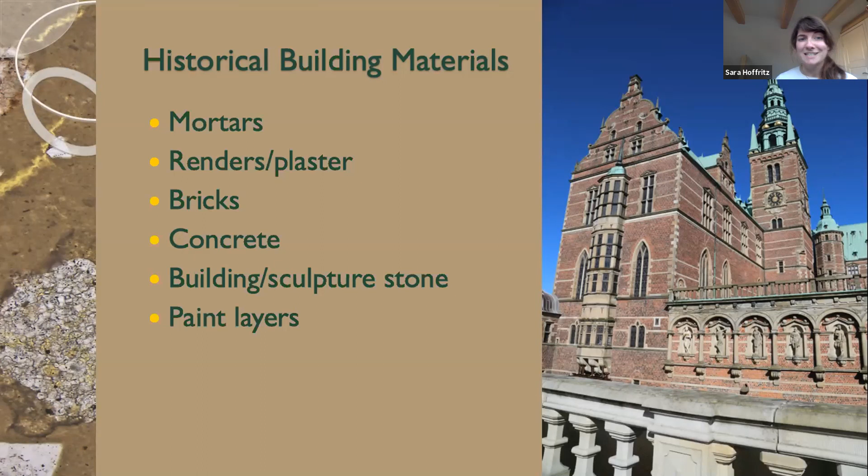So building materials, mainly we look at mineral-based building materials. We look at mortars, so the glue that you use to glue bricks together with. Mortars you also use as renders or plasters on facades and buildings. We look at the bricks themselves. We look at concrete that's usually a little bit older than this century. And then we look at building or sculpture stone, natural stone. And then we also look at paint layers. So actually quite a lot of different types of materials. And in Denmark, and I also assume quite a lot in England, these are the materials that make up most of our buildings.

So you might wonder, why is this geology? Well, I usually compare mortar or concrete to man-made lava. You have a combination of your phenocrysts, that's your sand in the case of mortars, or aggregates in the case of concrete. You have your matrix that's connecting your phenocrysts, that's your binding material. And in the case of mortars, that can be lots of different types of materials. It can be based on cement, which is a mixture of burnt lime and clay. It can be pure clay, it can be pure lime, it can be gypsum, and all sorts of different combinations. And then you also have your air.

So as you would have your air vesicles in your lava, we also have entrained or entrapped air in our building materials. You can also talk about flow structures, both for concrete and mortar. How easy is it to work with? Is it like a pahoehoe lava or like an aa lava? Which makes sense for a geologist, that the viscosity is of course different.

Then there's also the fact that you have new minerals that precipitate in air voids or in cracks. You can have alteration of your material, like in metamorphic geology, when you have alterations from one mineral to another. We also see that in our building materials. And in general, just basic mineral recognition under the microscope, knowing how to use the microscope, knowing how to recognize a mineral.

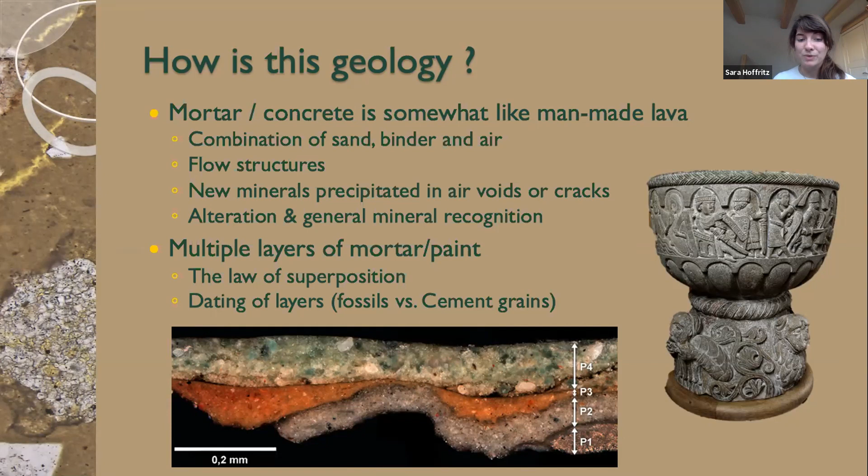And with this, we look at, okay, what is the binder material? How did they apply it? What pigments did they use for this? So quite interesting, but also geology. And then we also date our layers, mostly relative, but like how you would use fossils in a stratigraphy dating process, we also do that with some of the minerals that we see, or how the mixture has been of the mortar.

So the questions that my customers usually want answered, and the question I always ask myself, depending on whatever the customer wants, is where on the structure does this sample derive from? How old is this material? Is it original, or is it some kind of renovation that they accidentally took out and doesn't have anything to do with the original part of the structure?

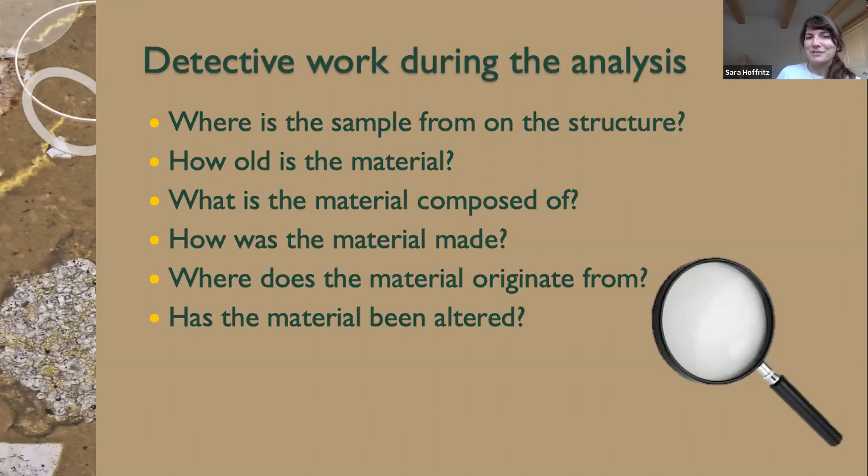What is the material composed of? What type of material is it? How was it made? Where does the material originate from? And has the material been altered? Depending on what the customer wants, we usually focus on some of these questions. And the question I want to take you through today is, where does the material originate from? Because all of the questions are approached with geological eyes, but where the material originates from is where you really get to use your geological knowledge.

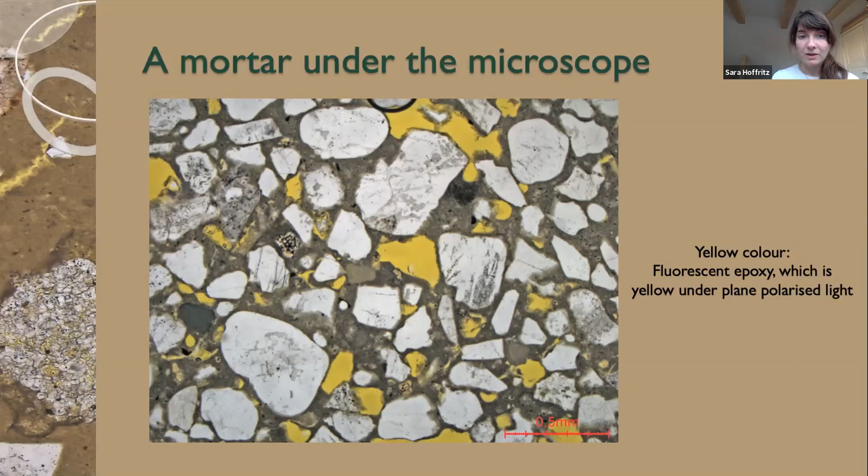All right, let's see, type of limestone. What do I look for when I try to figure out what the source of the limestone that has been used? So when you want to make a mortar, I don't want to get too technical, but you take some limestone, you burn it, and then you have different ways of mixing it with water and sand to create a mortar.

And often when you burn it, well, nowadays you do, but if you go back to the past centuries and back to the medieval ages, you have very uneven burning temperatures. And that means some limestone gets burned at high temperatures, some limestone gets burned at low temperatures. So very, very often we are able under the microscope to find pieces of the limestone that has just been burned just a little bit.

And that is quite important because when we look at these limestones, we can recognize where did they get the limestone from? And that's a quite interesting question to answer when it comes to, for example, what have the trading routes been in the 1100s, or was there any use of Swedish limestone for Denmark in the 18th century, stuff like that, are questions we can answer because we can recognize the limestone. We can differentiate between a Swedish, a Norwegian, a Danish limestone, and within those fields as well.

So what type of limestone? First of all, is it sedimentary? If it's sedimentary, what kind of fossils do I have? What kind of grain size is it? What type of limestone is it? If it's marble, I'll look at, is it a pure marble or does it have any other type of minerals?

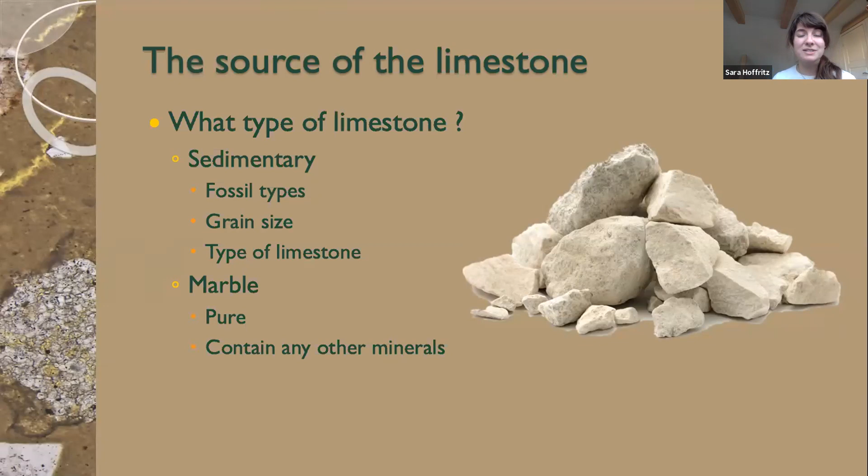And I always hold this up against where is my sample from? Are there any historical quarries that would make sense? And all this information, the historical, the archaeologist, and the geologist knowledge kind of mix in together to figure out what type of limestone it is. Is it reasonable to say that this is a Norwegian limestone in Denmark, for example?

So I have a few examples to show you how I differentiate. I don't know if you guys have any sedimentary petrography. I surely did not. I've never looked at a thin section of limestone during any lecture. So this was quite new to me. I'm still learning more and more different limestones under the microscope, but I picked out a few examples for you guys. So the rest is just pictures.

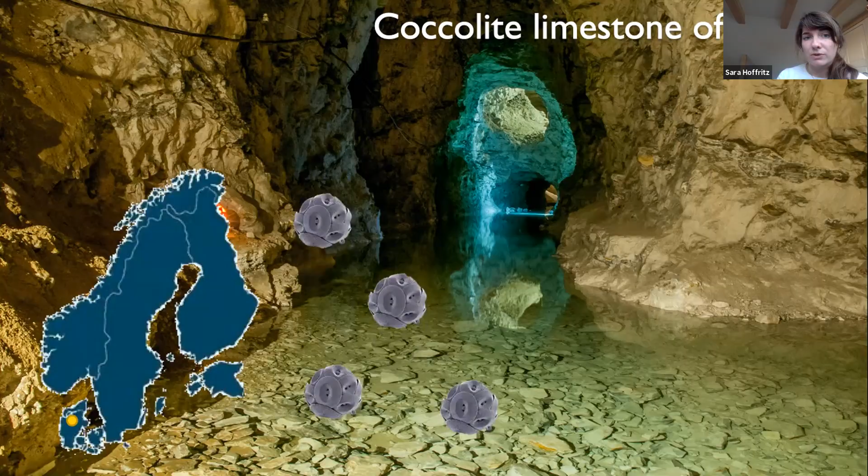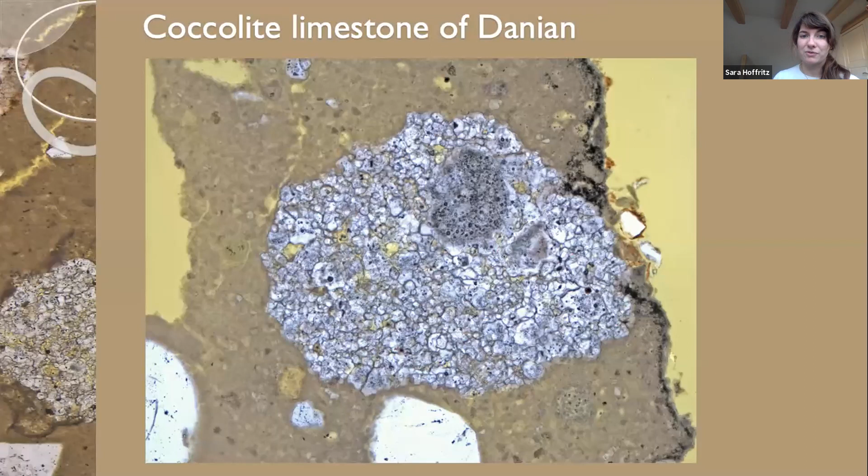And what you have here in the middle is a grain of underburned limestone. So it's a piece of limestone that has been used for a mortar, and it's been burned just a little bit, but not enough for it to completely dissolve into microcrystalline lime. So what you see here is that this type of limestone is made up of tiny, tiny grains of lime. So we're talking nanofossils, grains that are less than 5 micrometers, so very, very fine grained. This is in plain polarized light, and here you see it in cross polarized light.

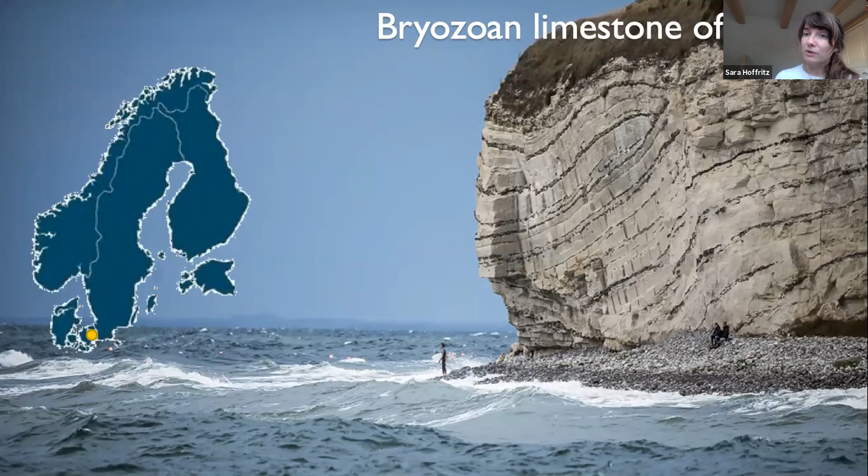We also, from the Danian limestone, have a bryozoan part. And we see this more in my area of Denmark, over on the eastern coast. This is a picture from Stevns Klint, which is a UNESCO site, where we have the fish clay that's showing the boundary of the dinosaurs dying out 65 million years ago. The bryozoan limestone of Danian is also quite recognizable, because there we get our bryozoans, of course.

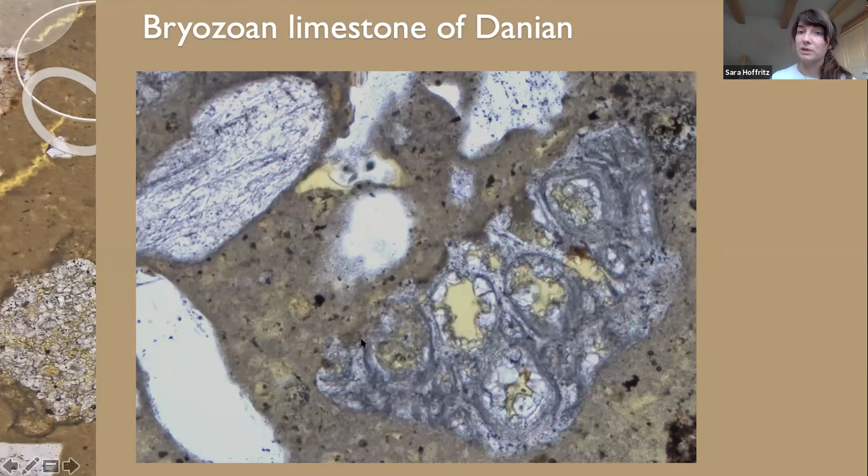So this is again plain polarized light, 200 times magnification. And the grain you see here has the remnants of bryozoan fossils. So this is also a way to recognize this type of limestone, because you have this fossil type and it's so dominant in this specific type of limestone. Under cross polarized light, it looks like this.

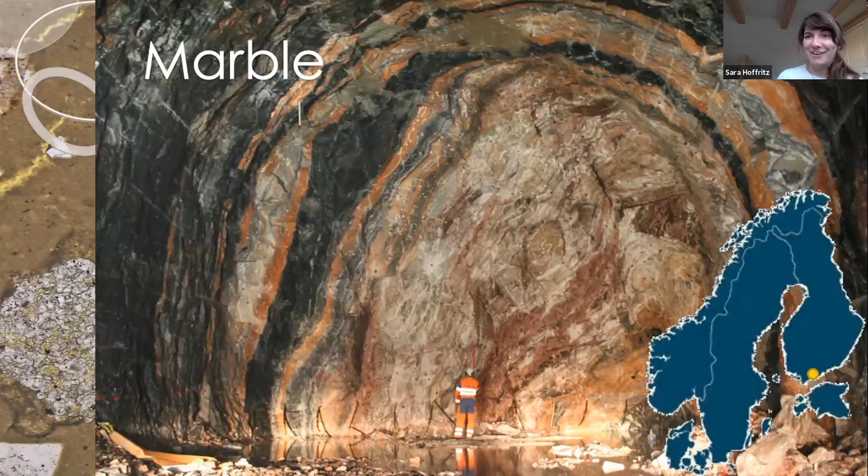Then we, from Finland, mostly get marble used for making mortars. And this is specifically from very close to Helsinki, where they have the Sipoo marble. And this is from when they were digging out a tunnel through the marble. And as you can see, it's not this pure white, clean Carrara marble. It's quite impure, I think it's called, sorry.

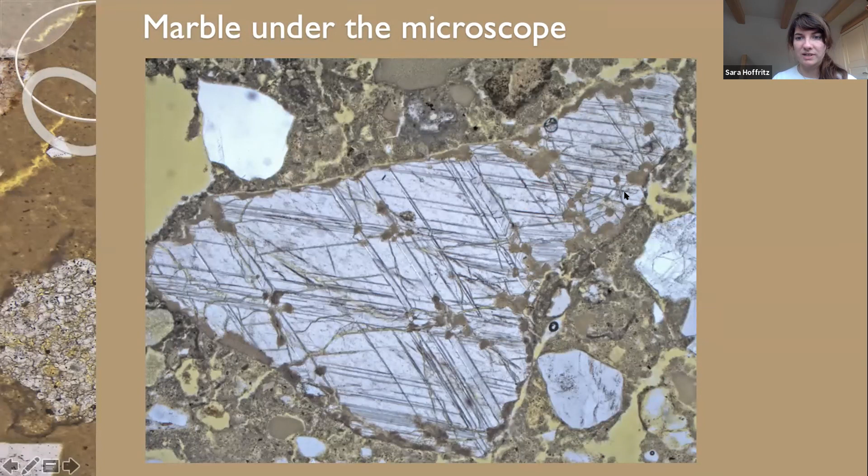And this is just to show you an example of the marble. You can recognize it with its lamellas passing through, and very coarse grained. This is at 100 times magnification. It's under polarized light and under cross polarized light. Here we have, this is taking the burning at a higher level.

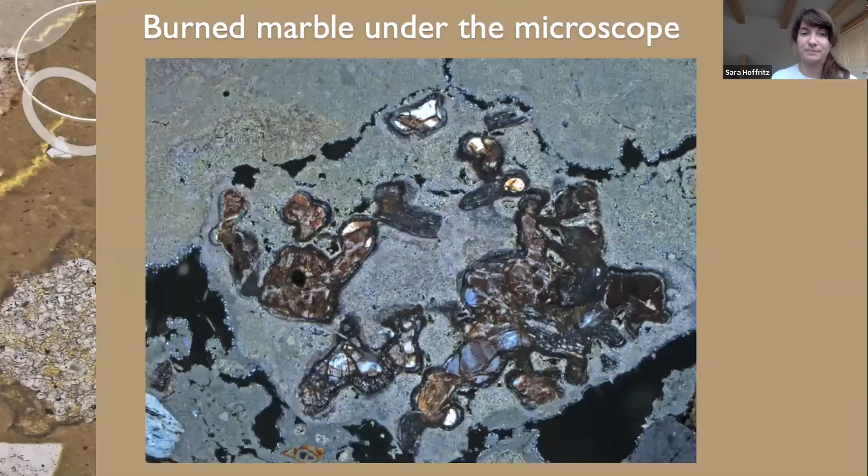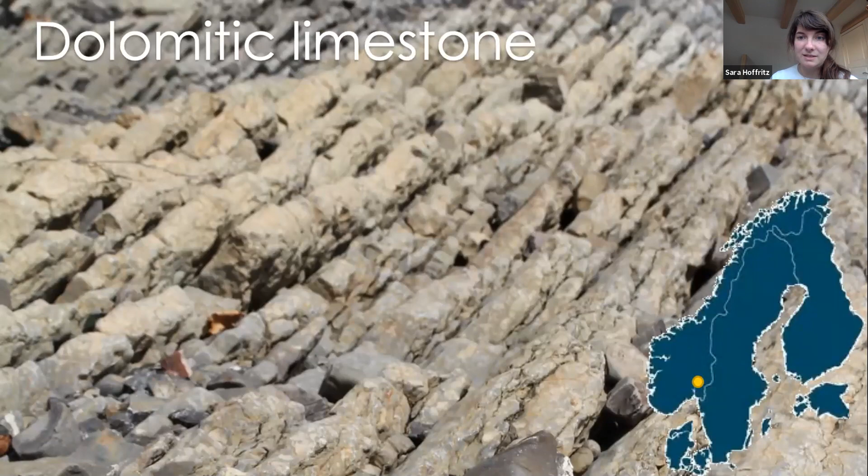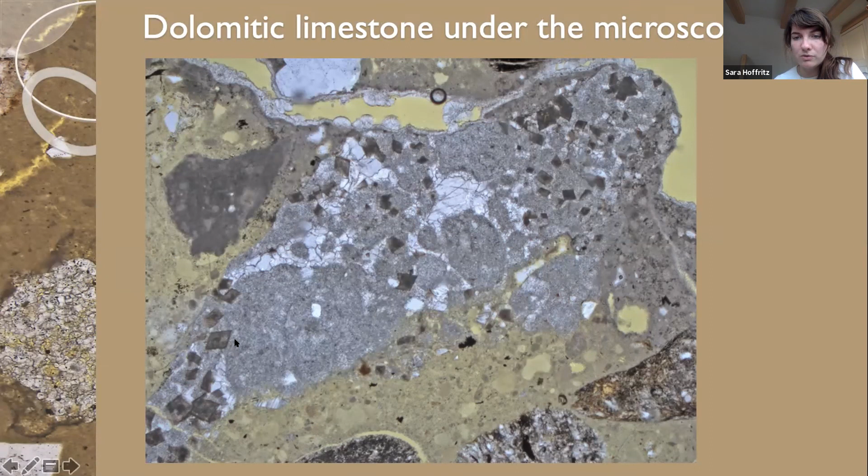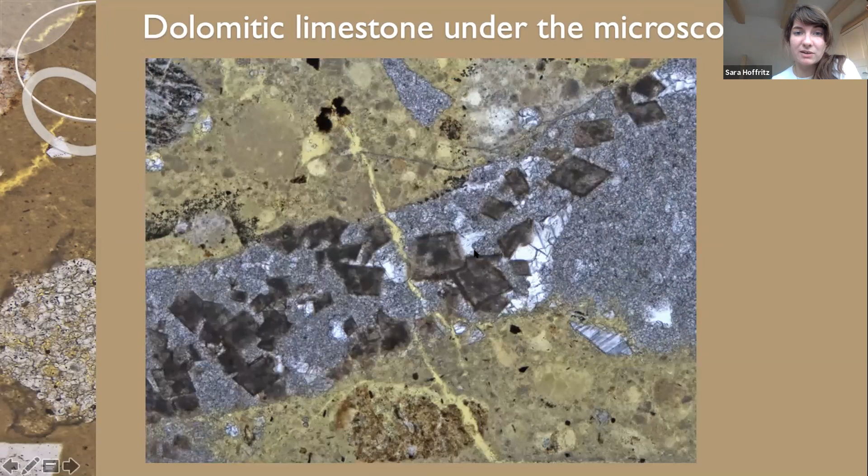And the grain consists of the micritic part, so it's very fine grained. Then it has these maybe previous cracks with coarse calcite crystals, some sparite crystals. And then you have these gorgeous small rhombohedral dolomitic crystals. This is under plain polarized light and under cross polarized light. And then if we take a little step closer, you can really see how nice shapes we're getting here, these diamonds that are scattered through the limestone. And at cross polarized light.

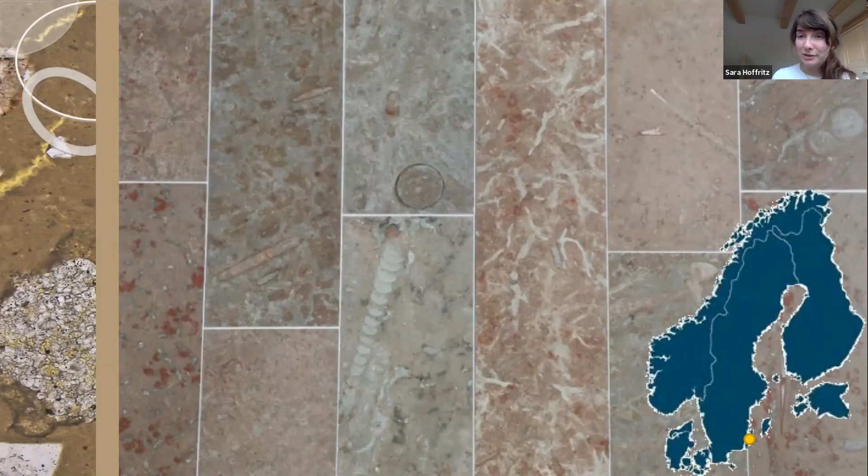One of the rocks we see most used, especially, of course, in Sweden because it's Swedish, but we also see it in Denmark and in Norway. It occurs in different varieties and it's often used as a facade stone. It's orthoceratite limestone because it contains the squid Orthoceras. And you can see it here on the floor from my university, where you can see the squids laying down here. And it has a very specific, unique red color because when it was deposited on the sea bottom, it was deposited with some laterite dust that has this red oxidized color.

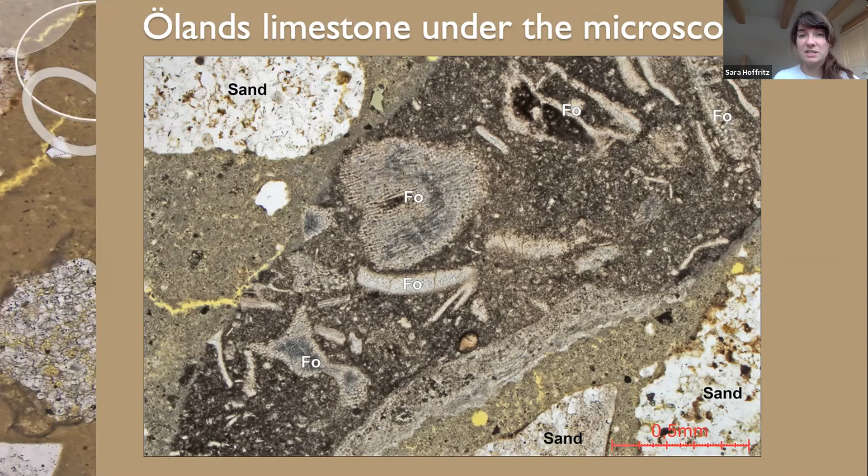And if we look at that under the microscope, these are just the squids. This is a very big grain. Again, for some reason, I finally remembered to put a scale on. You can see it's quite a big grain we have here. And how we recognize this limestone is we often don't see the squids, but we often have some trilobites or some sea lilies present in the grain as well. And then you can see the dark color. It's more visible on the next picture, where you can see the grain is sort of red in color. And that's very specific for this Swedish limestone from Öland. This is at plain polarized light, and this is at cross polarized light.

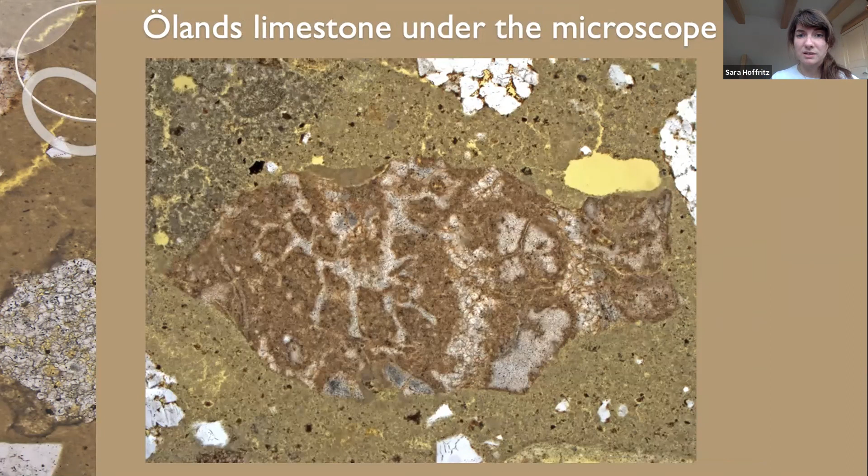Then last but not least, we sometimes come upon oolitic limestone, also from the Oslo area in Norway. And this is from, it's called Brønnøya. It's like a small island. And this is where they used to burn their lime back in the 1400s. And this is an example of the limestone. We always get them as very, very big grains. So you don't even get to see the boundary of the grain here. We're just digging deep into it.

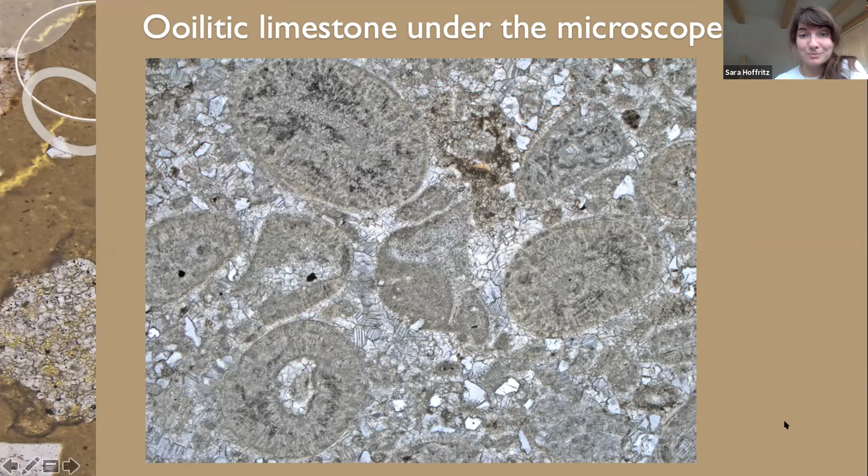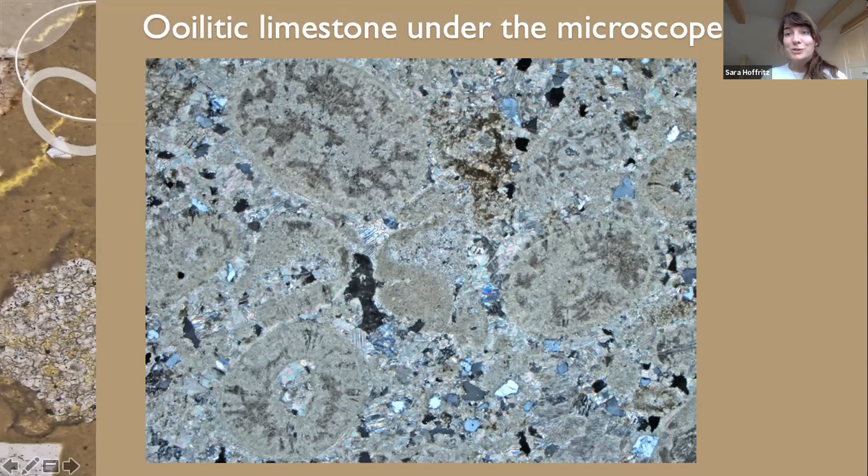And what you see here are the ooids, these spherical shapes in a mass of sparite. And also, again, very recognizable when we get it in the microscope. I'm not sure I have that in cross-polarized. Let's see. Yeah, okay, that's with cross-polars. You can still see you have your ooids, and then you have small grains of quartz scattered through the sparite crystals surrounding the ooids.

So those were a few different examples of limestone that I come upon, and this is a big aid when looking at the historical mortars that I look at around Scandinavia. And I look at a lot of other different things, but this was just to give you a little bit of an appetizer of what you can do as a geologist with historical building materials. So questions are welcome, and otherwise, thank you for letting me take your time.

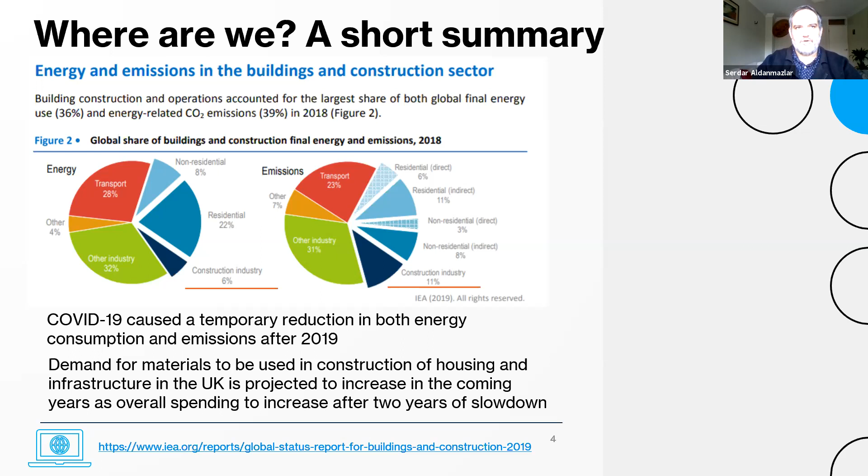but now that things are getting slightly better and the recovery phase is up ahead, it's expected that the demand for more construction, more buildings, more transportation structures, more motorways, more railroads is going to be up ahead. So it's supposed to increase in the coming years.

Okay, so this presentation is going to focus on two end user products: concrete and asphalt. Just a small note, whenever I mention pavements, I'm going to be talking about roadway pavements as in the American term, not the sidewalk that we use in the UK, in case anyone gets confused. I would like to start with concrete, which has quite a lot of interactions with geology when it comes to materials.

So just the basics: production of concrete is one of the most energy intensive processes you can think of, especially the production of Portland cement, which uses a lot of resources and a really high amount of energy. But it's also the cheapest and most adaptable material that you can use.

Like I said, it requires quite high energy, but in the recent, let's say, 20 to 30 years, there has been research about replacing the Portland cement in concrete with industrial byproducts like fly ash, natural pozzolans like volcanic ash, or ground granulated blast-furnace slag, what we call GGBS. So there's a push towards reducing the amount of raw material that's used. That's going to come up a little bit later.

So once we have the Portland cement, we have the second important constituent, the aggregates and fillers, which is quite relevant to us as geoscientists. These can be produced as they are from river beds or relatively young deposits, or they can be manufactured.

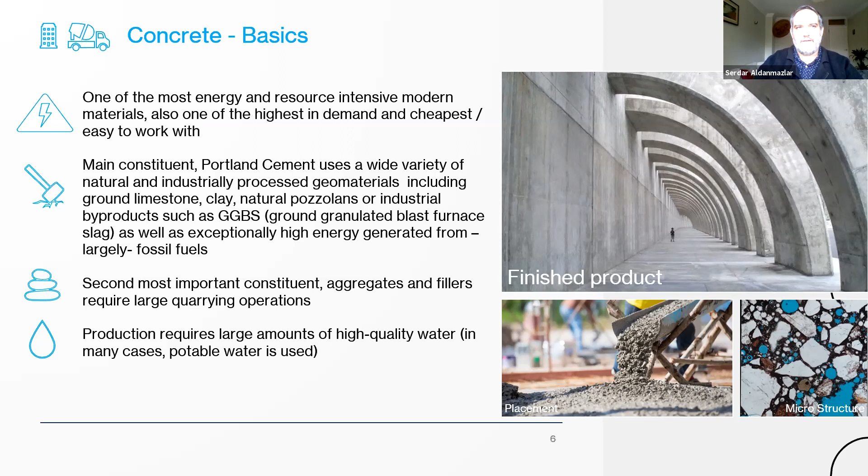And usually water is quite in the background, but it's quite important, because the production of concrete requires high quality water, in many cases drinking water. So the specifications require almost drinkable water. So as you can see, this production process requires a lot of materials that are directly needed for human consumption as well. So that's going to be one of the important points.

So mix design of concrete, selection of materials, performance considerations, and sustainability. When it comes to design of a material, especially concrete and asphalt, it is always a balancing act. There are no simple solutions. There is no easy way out. If you increase certain materials, or if you use certain materials, you have to balance it out with something else. So it's always a battle between the cost, the environmental impact, the health and safety, and the service life.

So you are always going to be thinking way into the future, because the effects can be observed way later, which can have really unfortunate results, if anyone is following the building collapse in Florida, which I'm also following as well. So this is quite important. Mix design of concrete is quite critical.

So as a geologist, as a geoscientist, our battle starts at the very beginning with soils. Basically every soil investigation for any kind of building or any kind of structure requires some kind of chemical testing that identifies two critical ions that can be damaging. There are many others, but the two main critical ones are sulfates in the soil and the groundwater, and the chlorides in the soil.

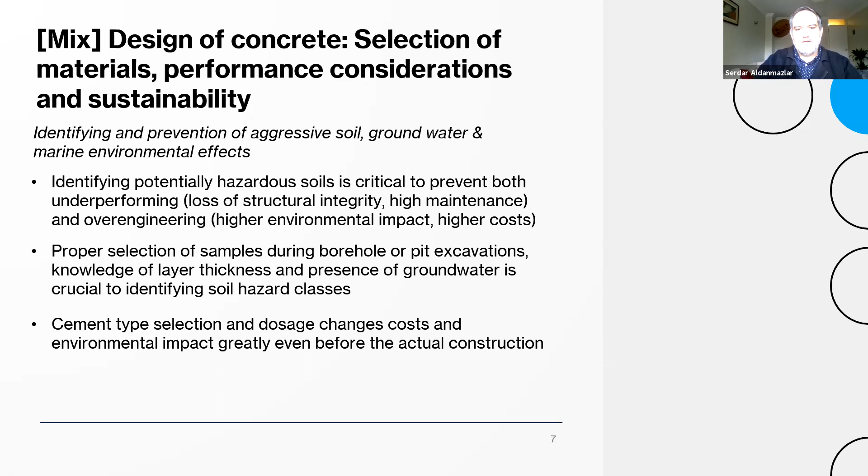So these are going to be directly affecting the design life and sustainability of the buildings, because the building will deteriorate much faster if they are exposed to these elements. It also affects the type of cement you are going to choose. If you are in a highly sulfate dominant environment, you have to have sulfate resistant cement, which changes almost every parameter in design.

So what are we looking for? First of all, high concentration of sulfates, especially water soluble. Acid soluble sulfates are not our immediate concern. That's a different type of problem, because if you have an acidic soil, that's going to be a much different problem. But what it can cause is severe cracking in concrete due to forming a mineral called ettringite, which expands greatly and cracks the concrete.

So what are the potential solutions besides identifying the soil structure and the soil chemistry? Like I said, sulfate resistant cements, or increasing the cement weight in a fixed volume, which increases cost and increases the environmental impact, and it makes the concrete harder to work with. That comes back to, like I said, it's always a balancing act.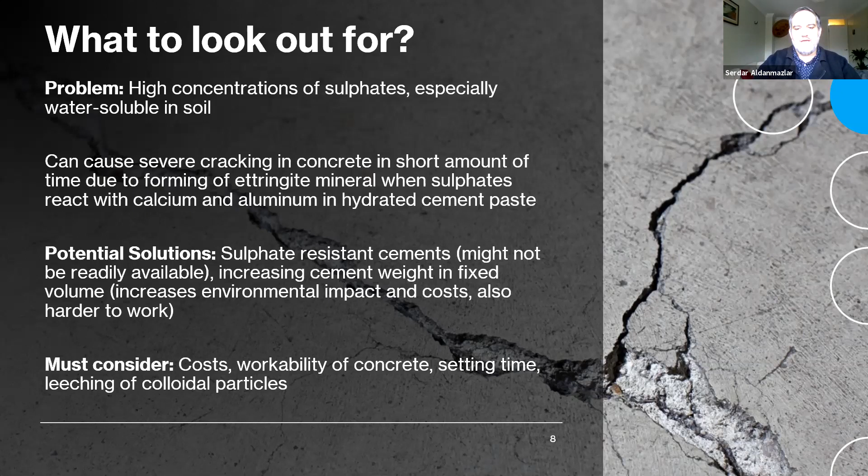So what do we have to consider? The costs, workability of concrete, setting time, and leaching of colloidal particles. So it's not always a simple solution of, okay, replace the cement. You have to consider all other factors.

And coming to chloride, it's quite simple. You can see in the background, chloride damages the reinforcement in concrete, which is probably one of the main reasons that the service life of buildings is quite reduced. It also affects maintenance; you have to have maintenance if you have exposed concrete like this, or you might have to evacuate the building.

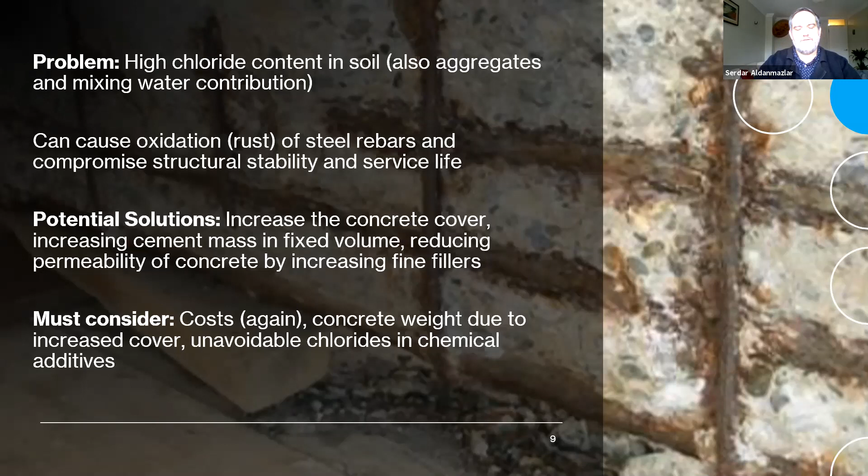This is also a problem in maritime structures, which have splash zones or direct impact with the concrete structure. So again, how can we fix this? You can reduce the permeability of concrete by increasing fine fillers, which are usually derived from quarries with high environmental impacts, or you can increase the concrete cover, which also increases costs. So this is just a sample of the effects it has on buildings.

So what can we do as geoscientists? Where do we stand? Like I said right the first time, initial geological surveys are the most important factors determining the design of concrete and the selection of materials. So having a good and precise identification of soil chemistry is quite critical. It can prevent much more costly mistakes later, or you can just have a much easier time knowing that you don't have any problems like that.

And the second one is, just like Sara mentioned, using what people in the past used, which is natural pozzolans. Since old Greek times, Egypt, Romans, every civilization used natural pozzolans, which can be volcanic ash or other pozzolans like ground up pumice stone. They are quite good binders on their own, but they are quite costly to produce or procure in general. But they can replace Portland cement in great amounts, and they are quite resistant to sulfate and chloride attacks. So that's one that can help us in the future.

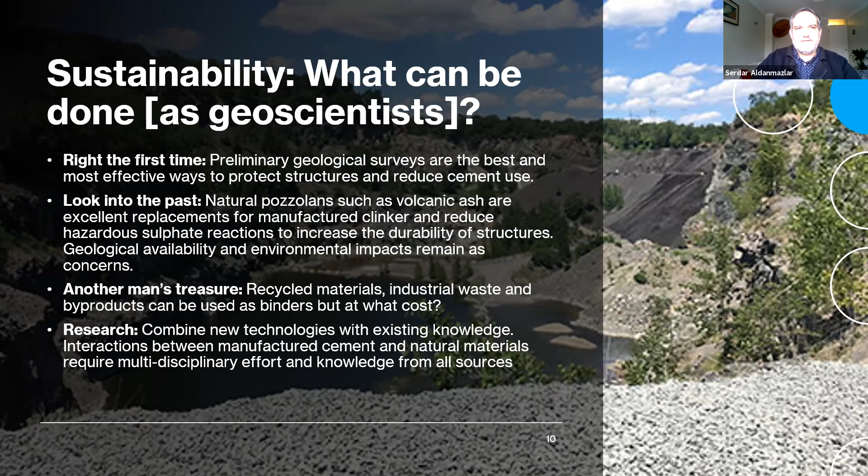And also research, because we still don't know what affects the performance of concrete and what the interactions between natural materials and manufactured materials are. So that also needs to be researched further. And the more research we do, the more sustainable results we will have. So moving on, we are getting a little bit more specific. Aggregates are the second most important part of concrete.

So aggregates control the workability, the long-term performance, and the strength of the material, and their chemical composition also controls the service life as well. This is where local geology comes into play. Not every country has good or reliable resources of aggregates.

For example, in the United Kingdom, Southern United Kingdom is more rich in limestone aggregates that are a little bit mixed with chalk in general. Northern, especially Scotland, has more granite or harder rocks that can be used in aggregates, but they have their issues. And also when I was working in Northern Africa, high quality aggregate was quite inaccessible.

When I was working in Turkey, high quality aggregate was quite accessible because Turkey had quite active magmatism, and also it was on the fault line. So you always had large amounts of hard aggregates within reachable distance. So local geology really affects the accessibility and the quality of aggregates.

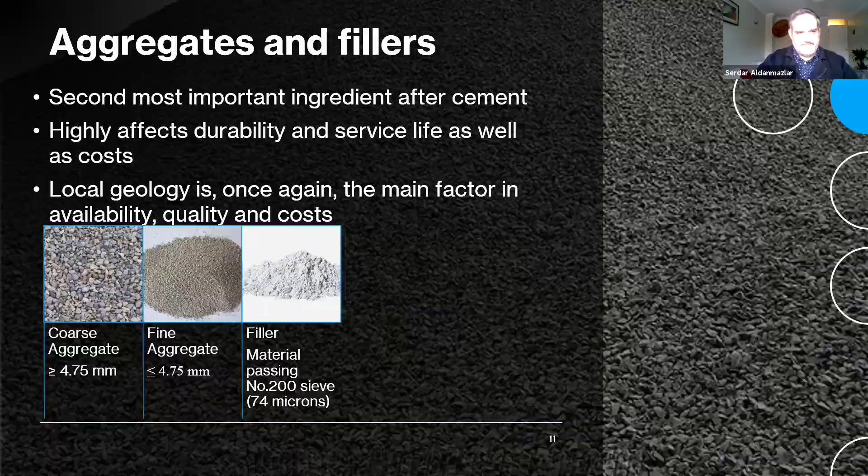Okay, as a basic property, abrasion resistance and freeze-thaw expansion resistance are what we usually look at in aggregates to classify them. So basically, this usually comes up first, and it's probably the most important factor initially. Then you will get into the other qualities. So this is the part that is highly controlled by petrography of the parent rock, weathering, and metamorphism levels.

This is quite generalized. There are so many differences and nuances to that, but generally, basaltic rocks or high silica quartzites are quite resistant to abrasion under loads. Limestone is considered median, usually good for structural concrete, but you might need much more resistant aggregates for specialized concrete.

Marble and gneiss, because of their layered structures, generally have quite high abrasion loss, so they're not preferred, but if you have to use them, you have to use them.

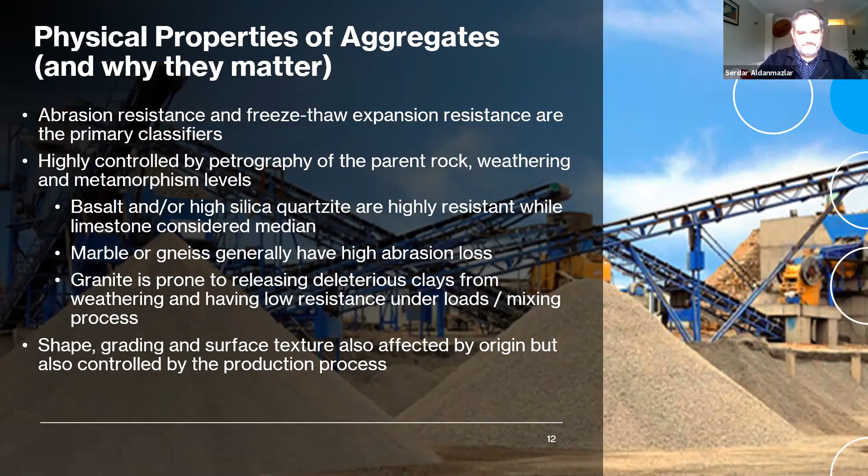Just a side note, there are two specific types of concrete which I'm not going into detail on: lightweight concrete and heavyweight concrete, which have quite specific uses. Heavyweight concrete is used in nuclear reactors as core cover, and lightweight concrete is used for marine structures that you cannot easily access. They use unorthodox materials such as shale or magnetite, but that's a whole other discussion.

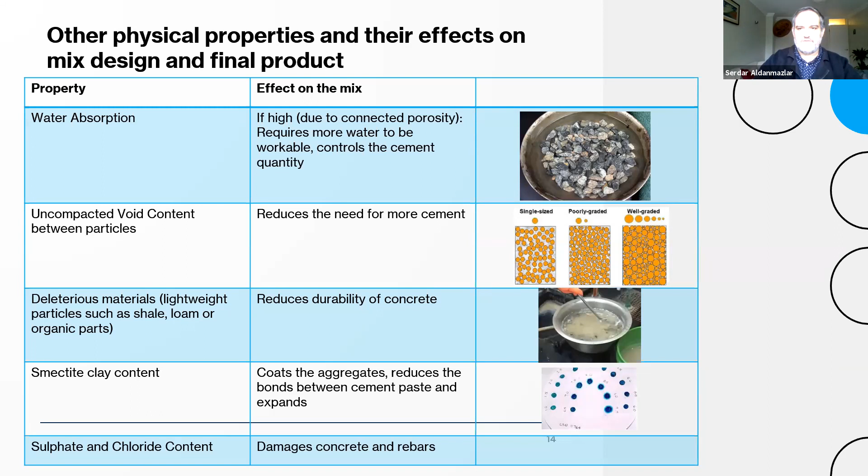Okay, moving on. Like I said, geology really affects what you need to do. British standards have United Kingdom specific tests that might not be used in other countries, and two of them are aggregate impact value and aggregate crushing value. These are physical tests that are done in the UK and other countries that adopt UK tests.

One thing of interest is that this is directly related to the geology of the United Kingdom, with limestones and chalks having a high amount of shell content, especially in geologically younger deposits. Shells obviously crack and disintegrate under load. So this is specific to the United Kingdom. In general, other countries might not use this or might not see the need to use it. So again, geology, mineralogy, and petrography control the production process once again.

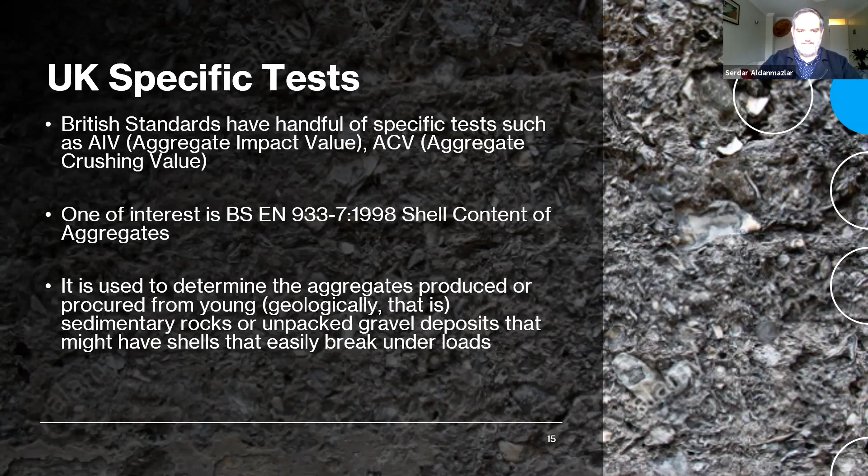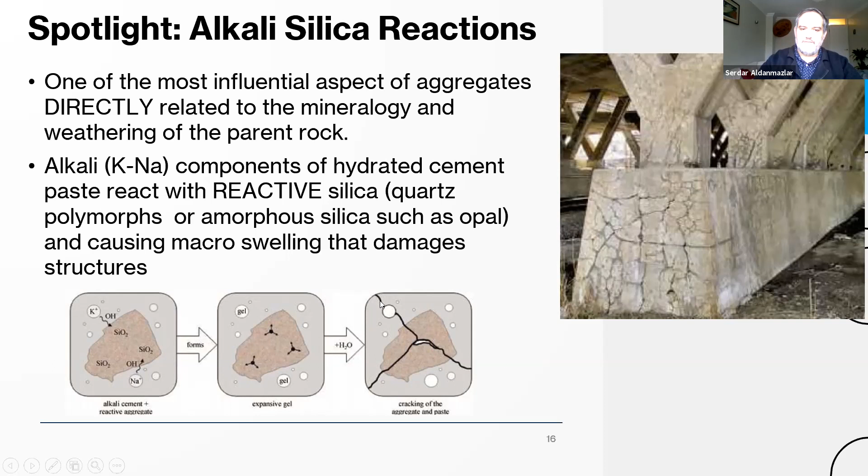The basics of it: the alkalis in the cement paste interact with reactive silica. Quartz is not reactive in this sense. We are talking about the polymorphs of quartz like tridymite or cristobalite, or amorphous silica such as opal. Even the smallest amount of these materials can be really reactive to the alkali in the structure. This will eventually seep into the aggregate itself and start cracking, which will expand to the whole structure.

Like I said, petrographic and mineral identification is quite important, which was part of my job as a quality control and quality assurance engineer in my previous jobs, to identify potential risks caused by mineralogy, and identifying reactive silica is quite important. In some countries, you might never have this problem. In some countries, you have to always watch out for it, but it doesn't mean that you can't use the material; you have to progress into more detailed and advanced tests, such as the expansion test, which is done in construction laboratories. But again, geology is the first line of defense in preventing costly mistakes. So I just wanted to have this as a sample case.

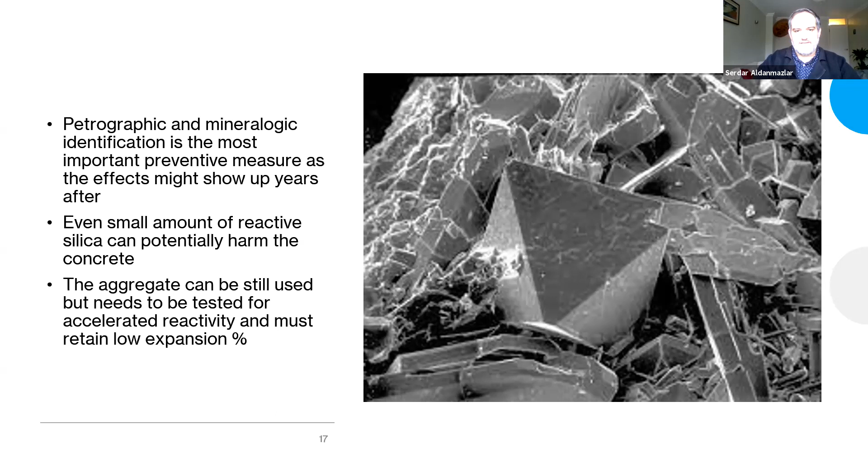Moving on, another sample research about how geology is important. This comes from our wonderful people at the USGS, United States Geological Survey. This is quite recent, in 2020. These notes will be distributed, and you can access the research or any links in here. So basically, in certain states, they realized some foundations deteriorated and started to crack really fast in many areas.

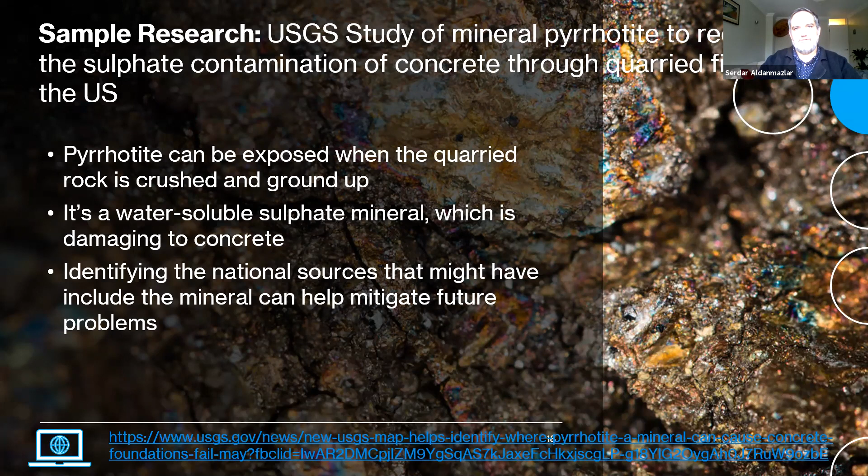So they did research about it, and it came down to pyrrhotite, which is a sulfide mineral that is like pyrite, but the difference is pyrite does not actively interact with water, while pyrrhotite reacts with water, which increases the amount of sulfates in the concrete mix. Again, we are going back to the total amount of sulfates. To identify the natural sources and prevent mistakes, this doesn't prevent the material from being used, but you need to know beforehand and take it into consideration during your mix design.

So they have this wonderful map of quarries and resources that have pyrrhotite, which can be easily used to identify, as you can see, the eastern seaboard up to Georgia, somewhere close to the New Orleans area, Louisiana, and the Seattle, Washington area, or California. So if you have a construction in the Midwest or in these areas, you can be a little bit sure it's not in the local geology to find this mineral, but if you are around these parts and having problems with structures, you can prevent this by taking necessary measures.

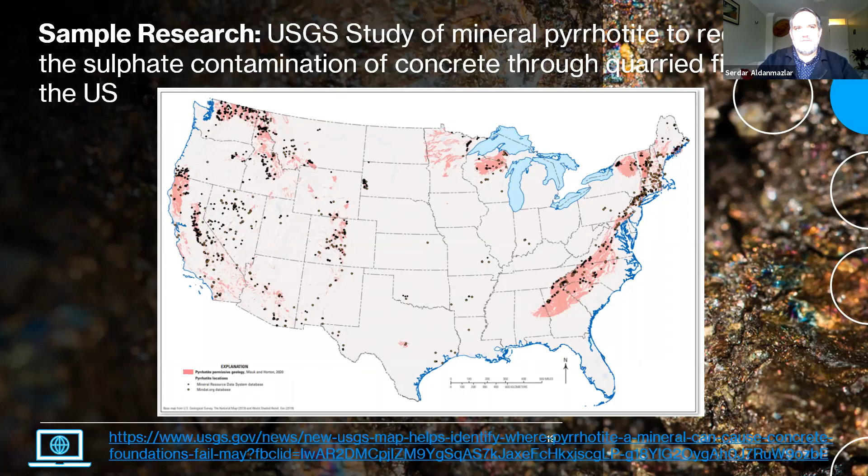Okay. So recycling, sustainability. We like to use the word sustainability so much. Everything has to be sustainable, everything has to be recycled. But is it possible to recycle, or to make everything 100% sustainable? Sort of, kinda. In concrete, like I said in the beginning, reliably recycling concrete and using it as fresh concrete is still developing. We are not there yet, as in the asphalt section. I will explain the differences. Because of the aggregates and the cement paste, they lose their properties once the reaction is over.

Well, technically the hardening reaction is never over, but it's way past its effective time. So, recycled concrete can be used in road construction as sub-base material, or you can reinforce weak soil as a replacement to using virgin aggregates.

Normally, if you have a weak soil or an organic soil, the standard solution is to remove the soil and use a good quality crushed aggregate, which is quite expensive and quite energy intensive. But you can recycle the concrete and use that aggregate and the remaining binder as stabilizing agents in weak soils, which is quite good.

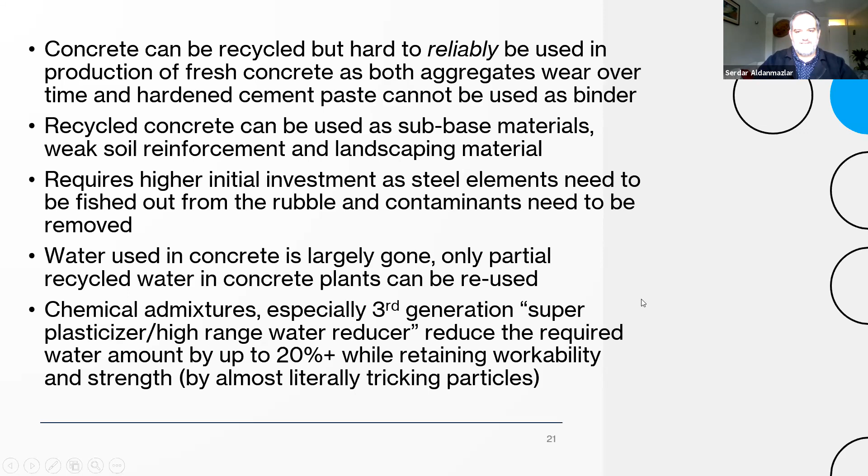As I mentioned in concrete, we have a binder, we have aggregates, we have filler materials, and we have chemical admixtures. The difference is bitumen is one of the most expensive binders in the construction industry, and as you know, it's produced from crude oil, a byproduct of the crude oil refinement process. And sadly, there is no viable alternative to replacing bitumen.

There used to be research about artificially producing bitumen in the 40s and 50s, which didn't turn out productive. So we are reliant on fossil fuels for the production of bitumen. Hopefully, with more shift towards rail or more sustainable transportation methods, we will see dependence getting less. But right now, we need quite a lot of bitumen.

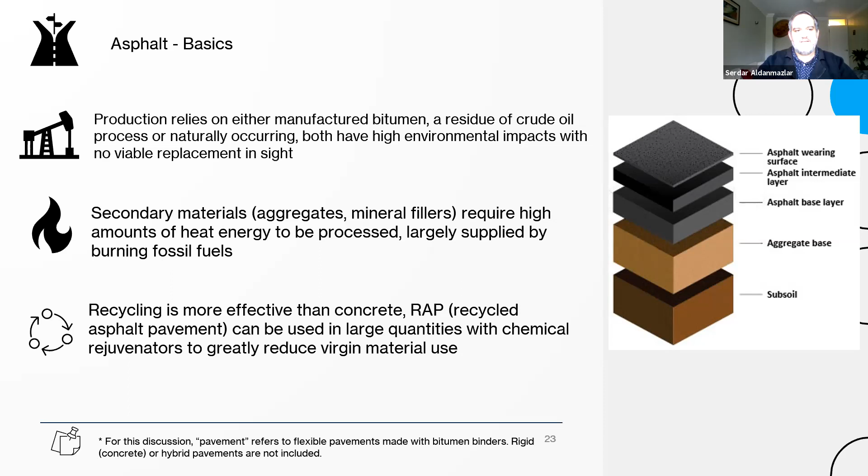Okay, moving on. Just a recap on bitumen. It's quite flexible, easy to work, used for a long time. The byproduct cannot be used as fuel. It's quite expensive, and it's derived from crude oil. Accessibility is not directly tied to geology. You can import bitumen because it's quite easy to store as cold bitumen. It can be reanimated with heat without losing too much of its properties.

But again, transporting it is quite dangerous and can cause extreme disasters. The construction industry in general is quite silent. Not many people think about how these things affect your experience, but in general, bitumen binder roads are much more pleasant to drive on. If anyone has had the joy of driving on a rigid pavement, which is concrete pavement, it's quite an unpleasant experience.

I think they are quite common in Germany. There are some, I'm not sure about the UK, but again, it's quite uncomfortable to drive on poorly made concrete pavements. In Germany, they perfected production of concrete pavements, which is also quite good. Again, balancing act.

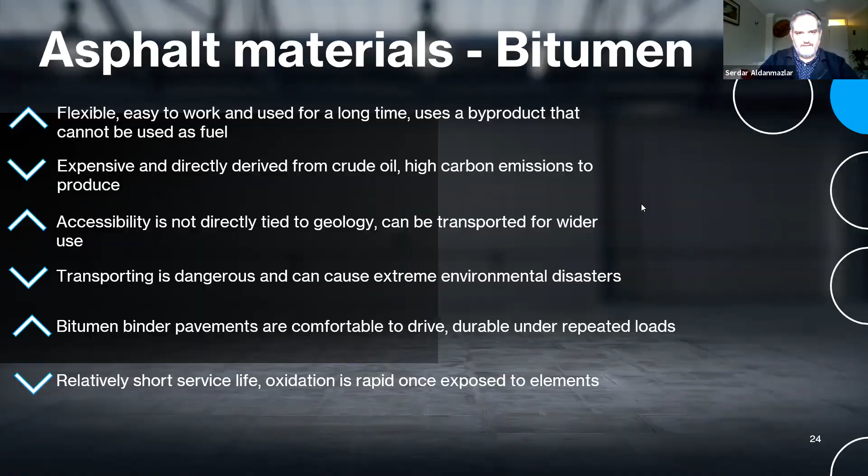This is not directly related to geology, because most of the time a geologist's job is finished when they found the crude oil. I think downstream, yeah. But the bitumen composition and the volatiles versus residuals can be controlled by crude oil type. So it's not even a single homogeneous material. A bitumen produced in Azerbaijan can have different properties than a bitumen that is produced in, let's say, Texas, but refined somewhere else.

So what you have to remember is bitumen is quite unique and it varies greatly, and many refineries nowadays use bitumen from multiple sources, so you might not even have the same material from the same refinery. So that's why bitumen standards are really strict, really controlled. So that really affects how you design an asphalt pavement.

And this brings me to the compatibility between natural aggregates. Again, we are back to geology. The physical and ionic levels of compatibility are quite important. These are quite good research topics, and there are advancements in this area. But the industry can be quite slow to catch up. But in short, aggregate mineralogy and chemistry affects how well bitumen clings to aggregate.

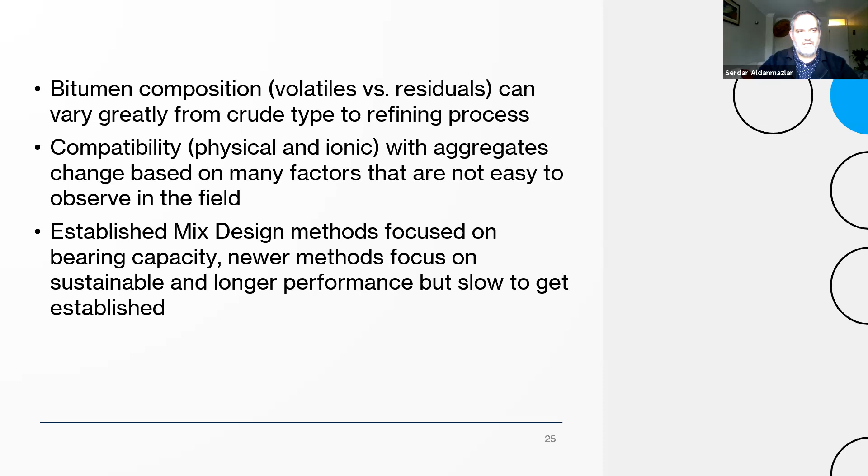So one of the main problems we faced was the established mix design methods are from the 1920s, 1940s. So they are reliable, but they don't take a sustainable approach or longer performance into consideration. New methods are developed and used widely, especially in the States and Germany. The United Kingdom is also catching up, but it can be a little bit slow. Okay.

Again, aggregates. Same with concrete. We need a good amount of resistance: abrasion resistance, freeze-thaw resistance. Same principles, with some important differences, which is asphalt pavements require higher quality aggregates, which kind of limits where you can procure these. In general, a Los Angeles abrasion value less than 20%, 25% is required, which is quite limiting, because especially quarries that have been operated for a longer time are now quite deep and in the weathered zones in general.

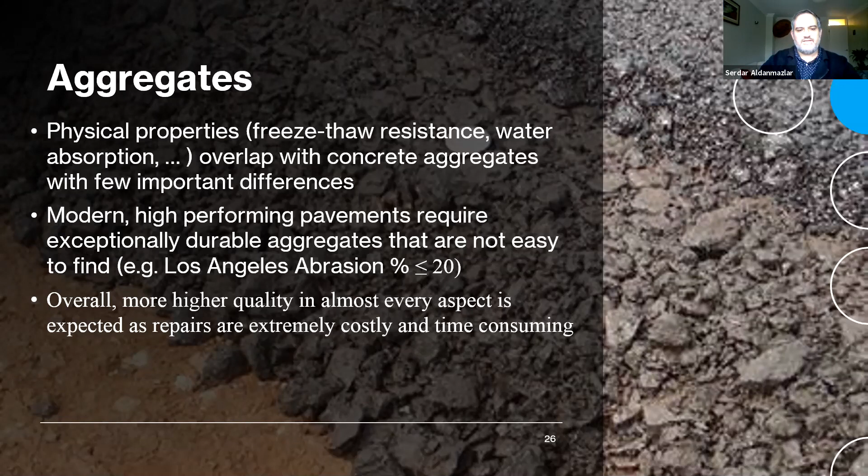Again, a geologist is quite important in this part, because if the operation of a quarry is directed by a geologist, or with good geophysical surveys, you can keep using the same quarry for a long time, or if it's not operated well, you have to close the quarry and move on to another one, which is getting harder and harder due to the high impact of quarrying materials. So overall, asphalt just requires harder and higher quality aggregate than concrete.

Okay, another spotlight, like in concrete, is a concept called polished stone value, which also affects your daily life, because the surface of pavements gets smoothed and polished in time as the aggregates get exposed to tire loads and lose their bitumen coating. This directly increases the braking distance, and this can cause a lot of car crashes or accidents. So this is quite an important value. This can make or break a mix design.

In general, rocks that have granular minerals like granites, or rocks that break non-uniformly, like basaltic or granitic aggregates, are more preferable, because when they crack under load, they expose fresh and more rugged surfaces, which increases the abrasion between the tires and the pavement. But limestone or sandstone tend to get smoothed and chalky. So you need more braking distance.

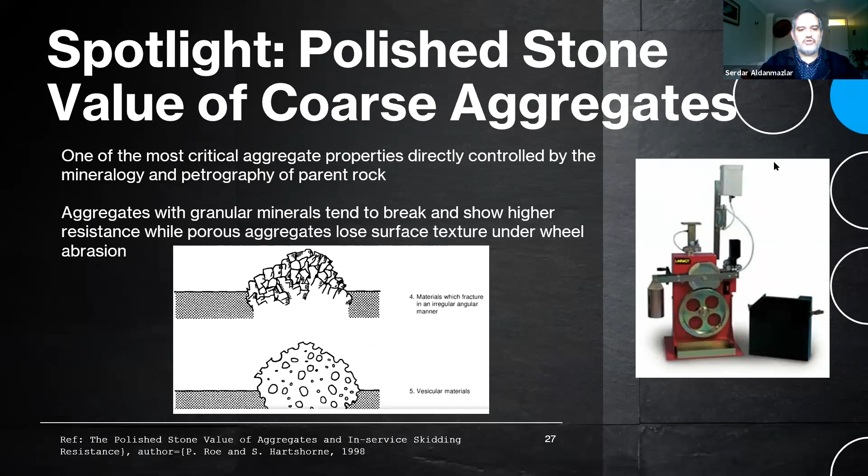Now that we have good bitumen, good aggregates, good fillers, we have different considerations such as rutting, which I'm sure almost everyone has encountered. These are grooves in traffic lanes, which are caused by static loads. Rutting is controlled by multiple factors, and aggregates are again a deciding factor. Good aggregates resist rutting.

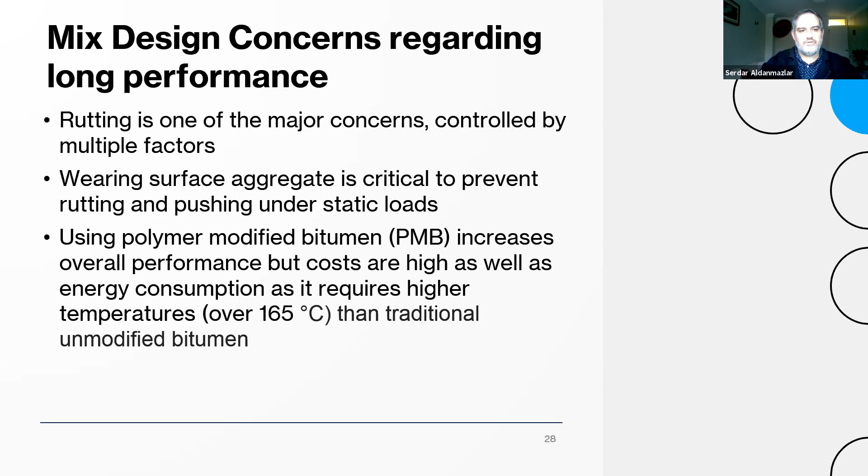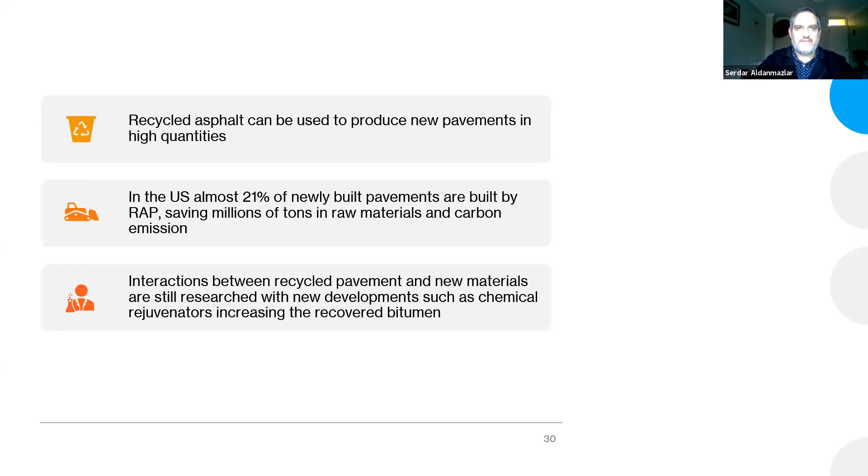Recycling. Again, like I said, recycling asphalt is much more effective in terms of being used as pavement material. In the US, around 21% of newly built pavements are built with RAP, which is recycled asphalt pavement, which saves tons of raw materials and carbon emissions. It's quite easy compared to concrete recycling, but the interactions between recycled pavements and new materials are still being researched. It can be much better, and hopefully this ratio will increase in time as we learn more about natural material interactions with manufactured materials. Also a great topic that I really enjoy following.

So in conclusion, in a general sense, we geologists, we geoscientists, share a common knowledge area. And if you remember from Sara's presentation, the concepts of the granules, the binders, the interactions between minerals, the chemical interactions, the compositions, weathering, resistance to abrasion. These are all concepts that are inherent to our knowledge, and the construction industry can benefit from hearing from us greatly, especially in prevention departments.

Again, there's so much to discover, so much to work on. This is quite open if you want to pursue a research oriented career, or if you want to pursue being someone who is in charge of selection of materials. That's quite an open area, and it's quite enjoyable to work in. And again, it's all about identifying risks, being preventive, being preemptive before things get damaged or cannot be used anymore. And I believe that geoscientists can bridge the gap between the construction industry, environmental concerns, costs, and geology. So we can be at the forefront of these things.